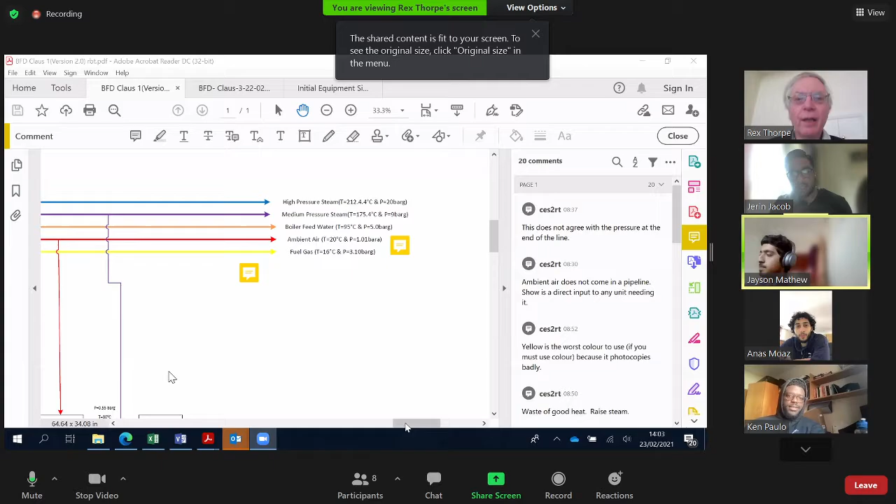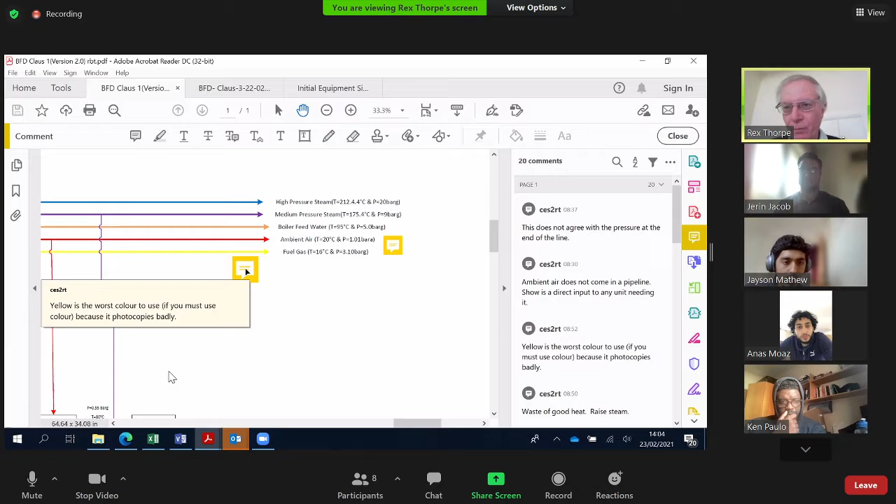Yes. No, can't see. Yes, yeah. Right.

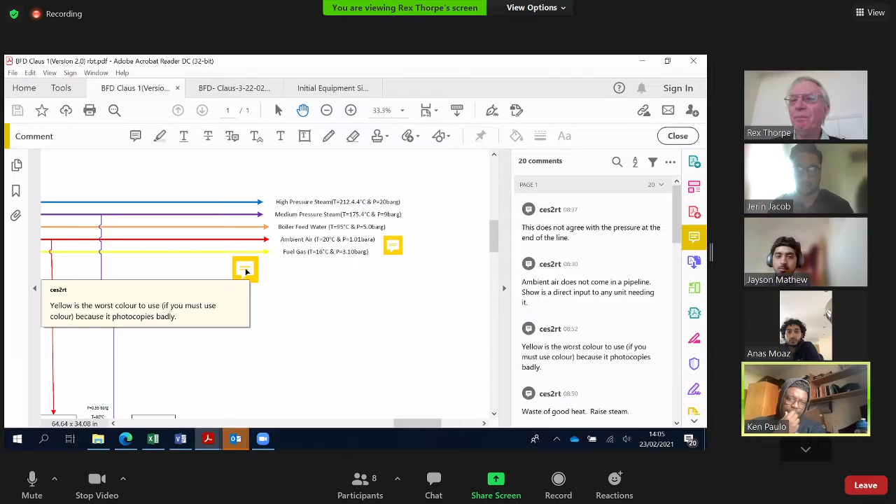You are not the first student to make this mistake. In fact, I would go so far as to say that 99% of students make this mistake. It's because they don't understand that these lines along the top are pipe lines. In fact, they're sometimes what we call ring mains.

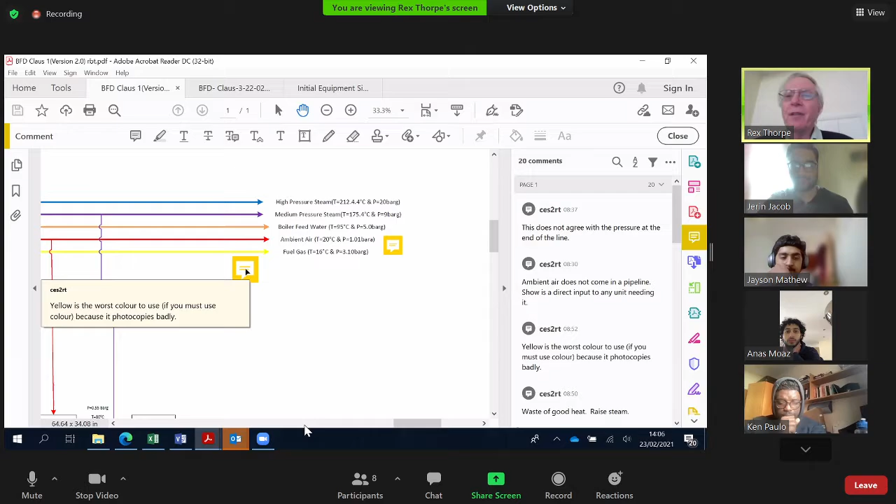And the idea of a ring main is that you have a ring of pipe that goes all the way around your little plot, and you can tap into any point on the ring main and take material out of it. So that one doesn't exist. So let's get through it.

Now, if we go backwards on this particular pipeline, notice it says 20 Celsius and 1.01 bar absolute. Mm-hmm.

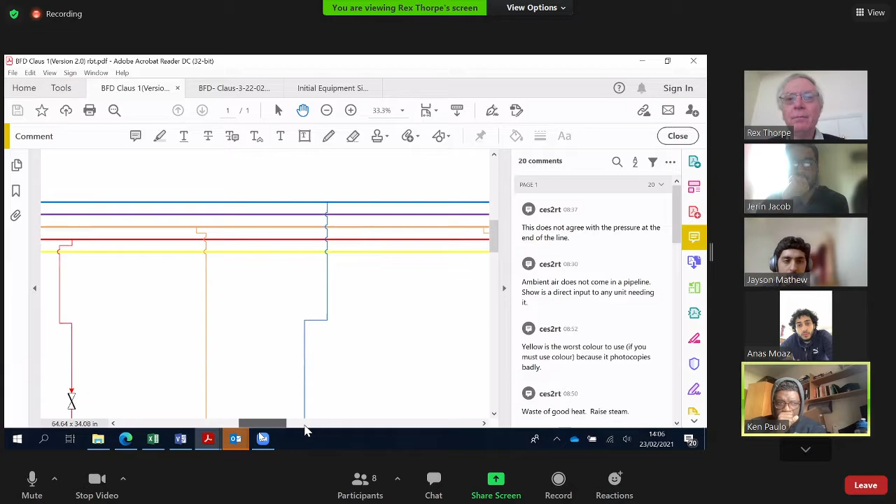That doesn't seem very consistent, does it? They're saying it's 16 Celsius and 0.53 bar gauge. That's not supposed to be, is it? I don't think that's supposed to be that. I think that's a stream. Another stream's. Well, it needs putting in the right place. Yeah, sorry, my bad, yeah.

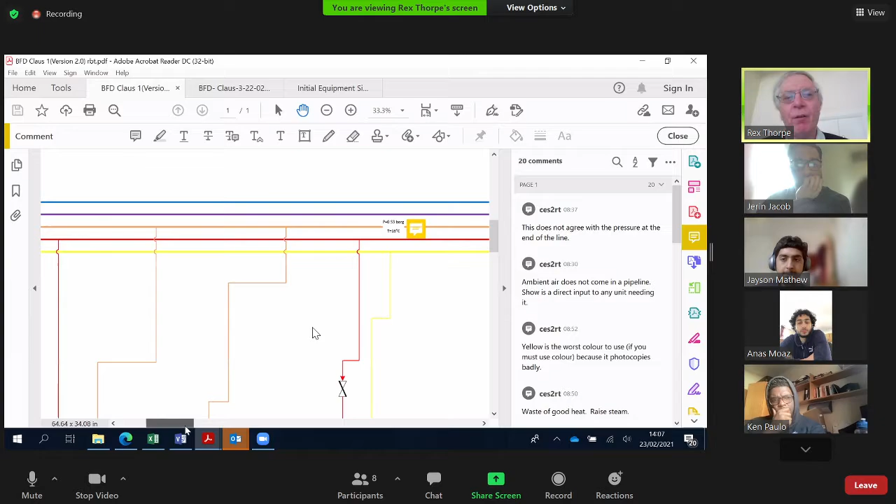Now look, there will be things on the block diagram like that which just need sorting out. But you've got to try and get this block diagram pretty well sorted out very soon. Yeah. Okay, all right. So let me have a look at this.

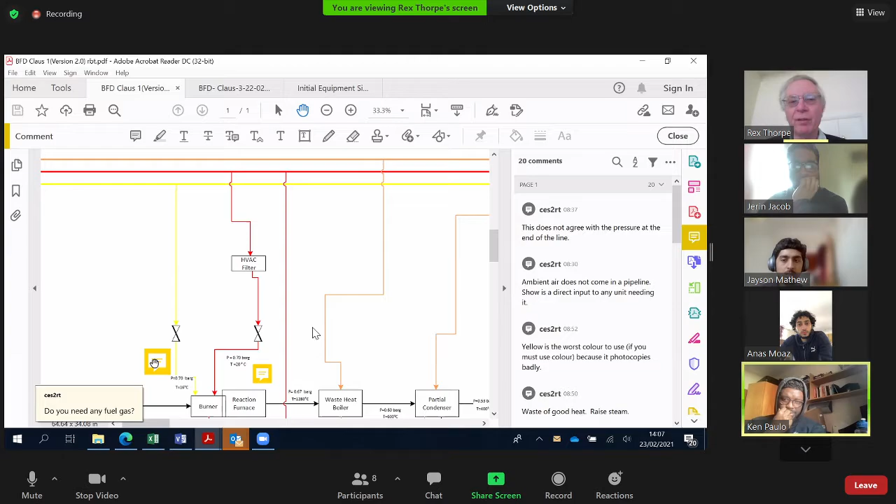So who is responsible for this part of the block diagram? Is there any person who's going to confess to being responsible for this area? Or, as in design? Is it in terms of design? Well, or do I just ask people at random about this? Do you all know about it? Yeah, as a group, yeah. As a group, okay, so let's start with Jerin.

Okay, why you have got this line coming down from this is fuel gas, right? Yes. Why do you need fuel gas in your burner?

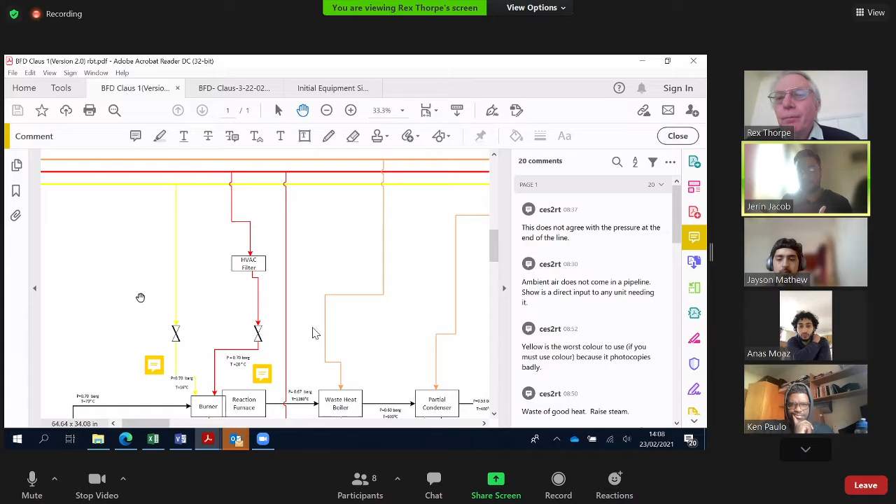So what I assume happens in the burner is you mix fuel gas with oxygen, and the combustion reaction produces a highly exothermic reaction, so the flames would heat up the reaction furnace, so that partial oxidation can occur.

Well, that's the key word, partial oxidation. Do you think that partial oxidation is exothermic or endothermic? It would be endothermic. No, it's exothermic. Exothermic, yeah. Also, not as exothermic as a fully oxidized reaction.

No, but it's enough to reach the temperature you need. You don't need any fuel gas. Okay. And if you do use fuel gas, it throws carbon dioxide into the system, which you have to get rid of later. So, no, you don't need any fuel gas.

So we're not considering using HP steam? Well, I'm coming to steam in a minute. Oh, sorry. I'm seeing as you're next on my list. No.

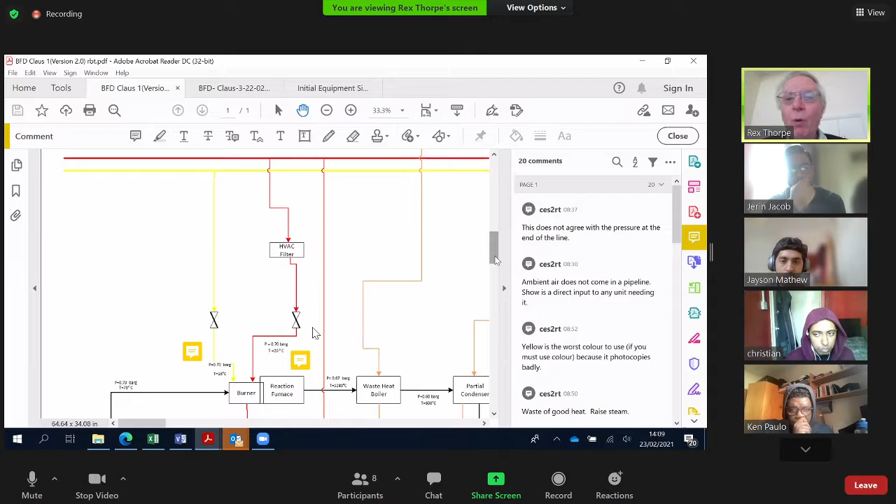What is this stream? So that stream would be the return for the flue gas. That's the return for the flue gas. What flue gas? So initially we were planning to use flue gas for a reaction furnace.

So once it gets used up in the process, I think it should go to like a return. But unless you haven't got any fuel gas now. Oh, okay, so why do you need some fuel gas?

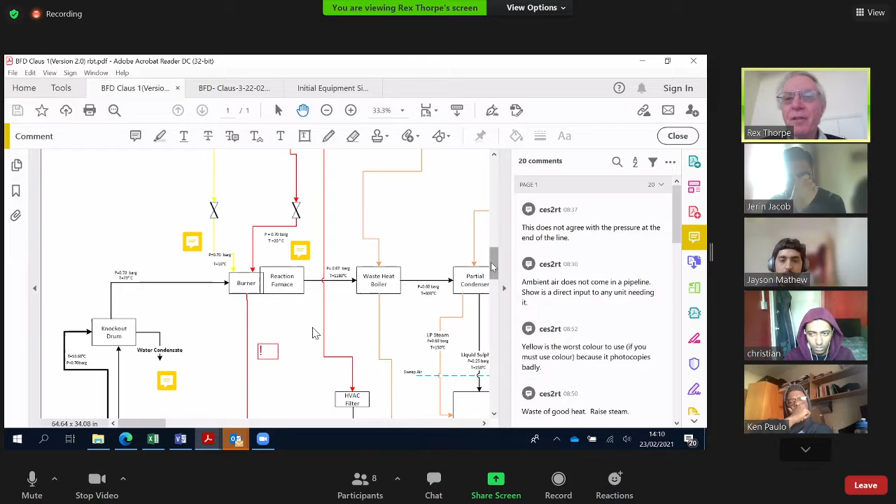So it would be condensate if we use HP steam. Well, I don't know that you're using HP steam. Oh, okay, sorry, yeah. Are you using HP steam? We were planning to use it. Where's the HP steam supply? Sorry, so we were planning to use HP steam, but then we're stuck with flue gas.

Sorry, I don't understand what's in your mind here. If there's no fuel going in, there is no flue gas. I suspect you're thinking this is like a furnace, in the sense that when you look up what a furnace is, it has air and fuel going in, which burn to create flue gas, and in doing that heats up something. This is not that kind of furnace.

This is really just a burner with a space for the flame to be in, which we call the reaction furnace. The burning and the reactions you want are the same thing. So you do need the air, but you don't need any fuel gas. You don't make any flue gas. Your flue material is the process flow.

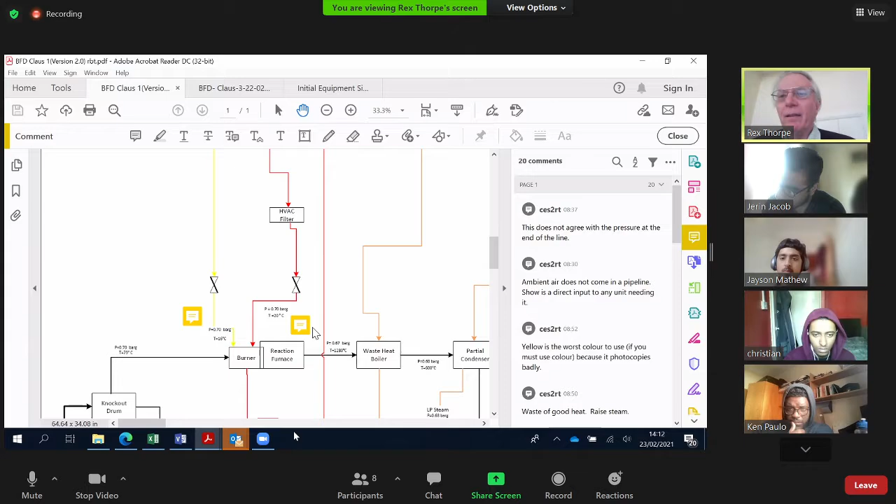If you've ever run a gas cooker, or done some camping and had a Calor gas stove, you'll understand there's a device through which the gas comes. That is the burner, and the flame sits on it. It doesn't touch the burner, but it is in a stable configuration with respect to the burner, and it sits there, then the flame is in the right place, and you can put your pot on top, and it gets heated up.

So the burner is a distribution device, and the reaction furnace is the space in which the flame sits, and the flame is the reaction. You have to surround that flame with something to make sure it doesn't burn the passing operator or some other bit of the plant. So that's why you need a piece of equipment called the reaction furnace.

So because we're burning something, is it a good idea to use a jacket, or do we not need a jacket?

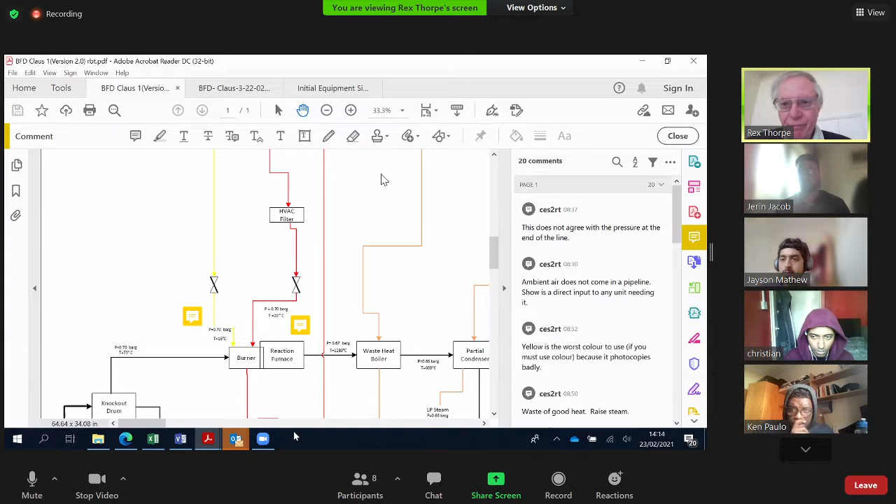Now you're asking about the construction of the furnace. In a conventional furnace, what you have is a fairly thin steel wall, and then you line it with bricks on the inside, which we sometimes call refractory bricks. The flame then is inside the bricked part of the chamber. What the bricks do is insulate the metal outer layer, which is what stops the gases from escaping. The metal is insulated from the hot flame by the refractory bricks, and therefore the outer skin of metal is at a modest temperature, and therefore doesn't need to be made of anything very expensive.

Thank you, sir. It's much easier to stack the bricks if your reaction furnace is vertical, not horizontal. You're showing it horizontal at the moment, but it's a block diagram, so don't worry about that too much until you do the PFD.

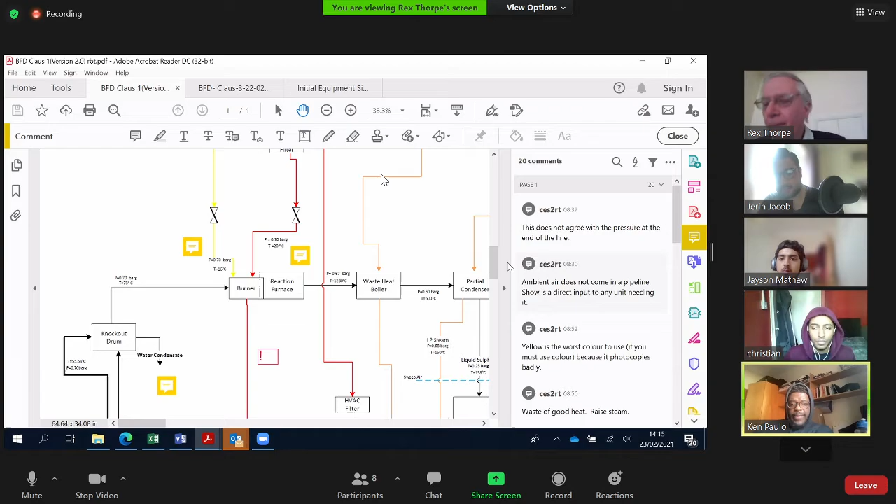I'll ask Ken. Yes, sir, where does this water condensate go? We were planning to use a recycle, but we found out it wasn't a good idea, so we thought to dispose of that condensate. You want to dispose of it? Yeah, dispose it or do a water treatment to avoid environmental impact. You want to send it to wastewater treatment?

Yeah. Okay. You have in your brief a requirement for the cleanliness of that water - you need to be able to send it to wastewater treatment. I doubt very much you're meeting that requirement, and the reason is there'll be too much dissolved hydrogen sulfide in that water, because it's just been in contact with sour water stripper gas and acid gas.

How come you can't recycle the water condensate? Is it because it's got H2S in it? Well, where are you going to recycle it to? So can we recycle it back to the knockout drum? That's what I was thinking as well. Well then, no - water is arriving there. You can't just recycle it.

Or we could preheat it. It's in gaseous form, so you can't directly put it into a knockout drum. So you can either heat it before it mixes, but then there's the heat duty. But even if you're heating it, what's the point? I mean, because there's H2S in that water condensate, if we preheat it the heater would have a high duty. It's less than 100 parts per million, so it's not a huge amount of hydrogen sulfide.

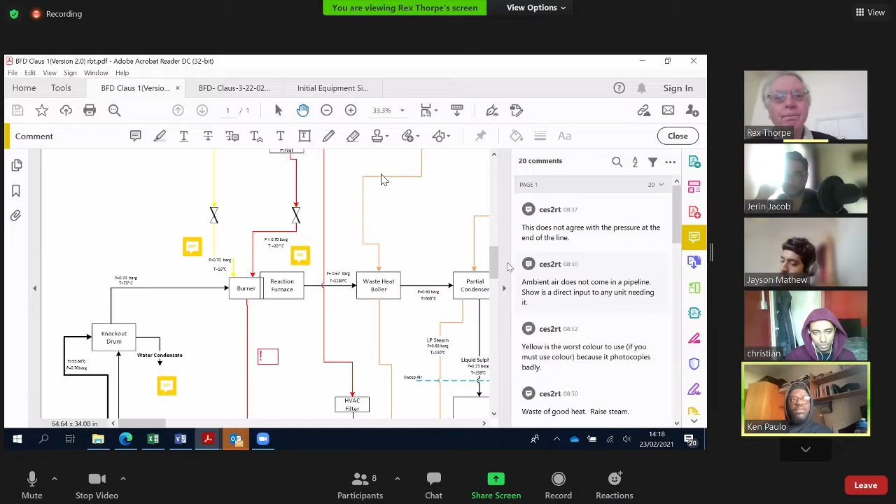Can we dispose it? We can't, no, H2S. You're being told in the brief that somebody will take it. You can send it to wastewater treatment at the refinery, provided you remove some of the hydrogen sulfide from it. Okay. We'll come back to that in due course.

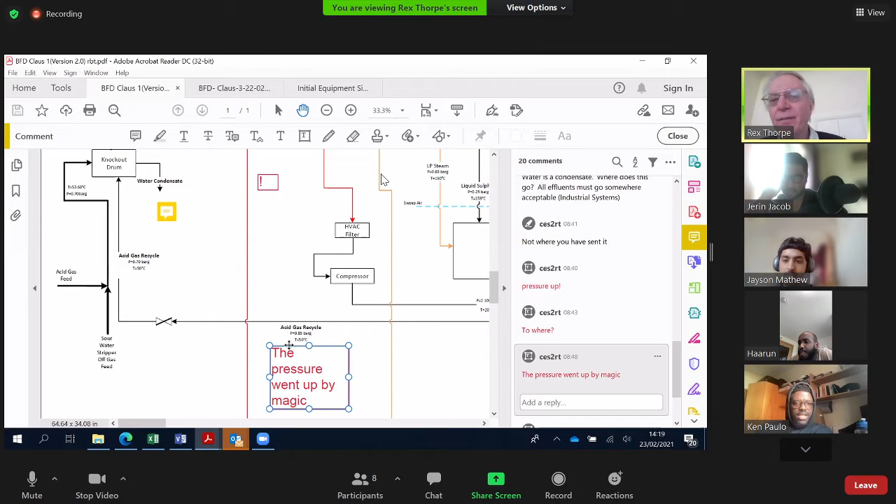No, you don't endorse that pressure. Why do you? Well, okay, what pressure should there be on that line? It should be the same as it left the reflux drum. Right, very good. But what is the pressure at the reflux drum, Haarun? 0.55. 0.55 bar gauge, yeah.

So how does it go into the knockout drum then? How does it go into the knockout drum? Knockout drum is at 0.7. There's a valve in front of it. Sorry, valves do not increase pressures. So you have to put a compressor there. You can't, it's full of hydrogen sulfide. Yeah, sorry, that's actually dangerous.

Would you use a - I don't know the answer actually. Sorry. I'm being very hard on you, Haarun. I'm driving you into a logical dilemma. The gas going into the knockout drum must be at 0.7 bar gauge. At the moment it's coming from somewhere where the pressure is less than 0.7 bar gauge, and you can't use a compressor. How about if you use a pump? No, it's a gas.

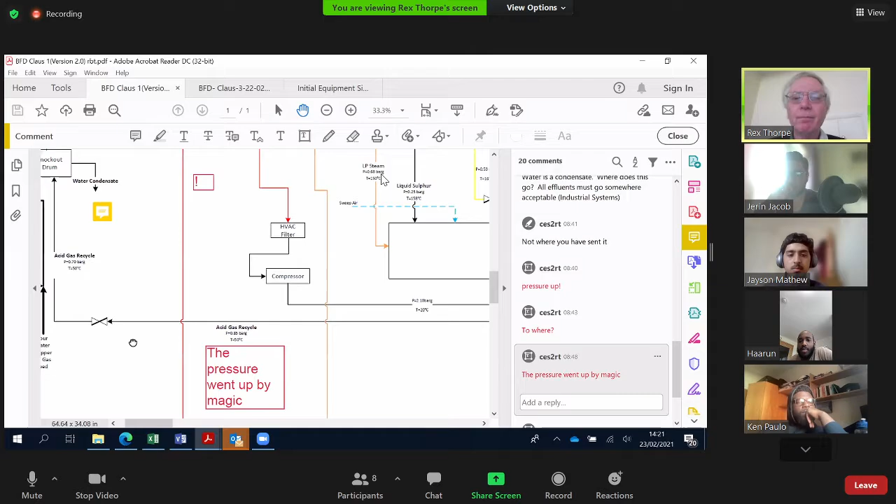So what's actually wrong is the pressure of the reflux drum. We're travelling a long way. Here we go, the reflux drum. So at the moment the reflux drum is at 0.55 bar gauge.

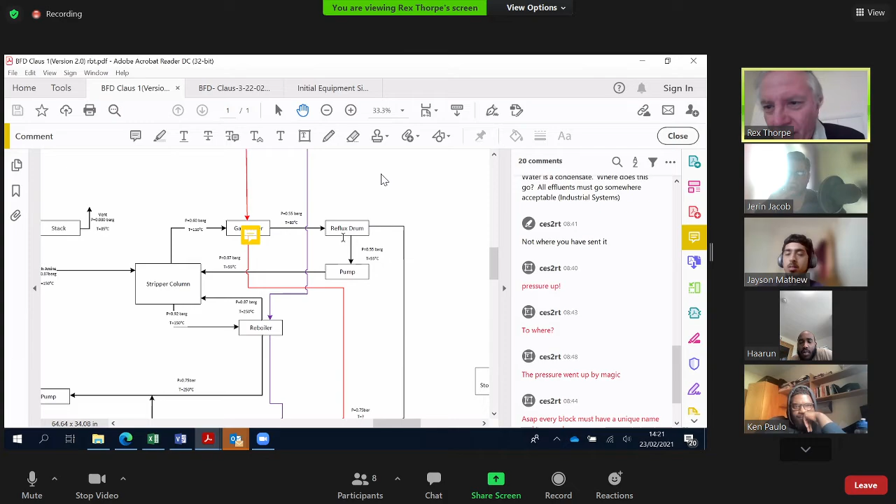You need it to be at least 0.75. Okay, but that means that this has to be 0.8. Okay, which means this has to be, well, probably more than 0.87, right? Yeah.

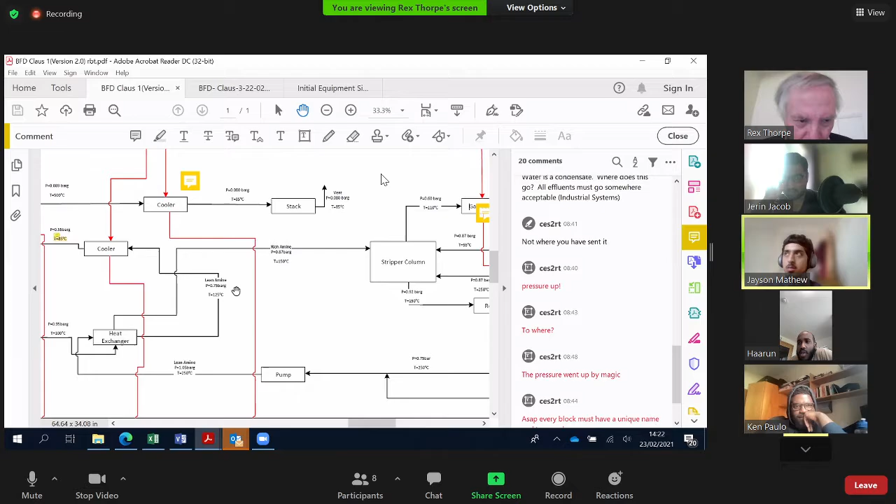Which means that this pressure should be higher, so increasing the absorption column. But that's okay because you've got a pump. Yeah, we can increase that pump, yeah. We can increase that. Yeah, okay. So, column.

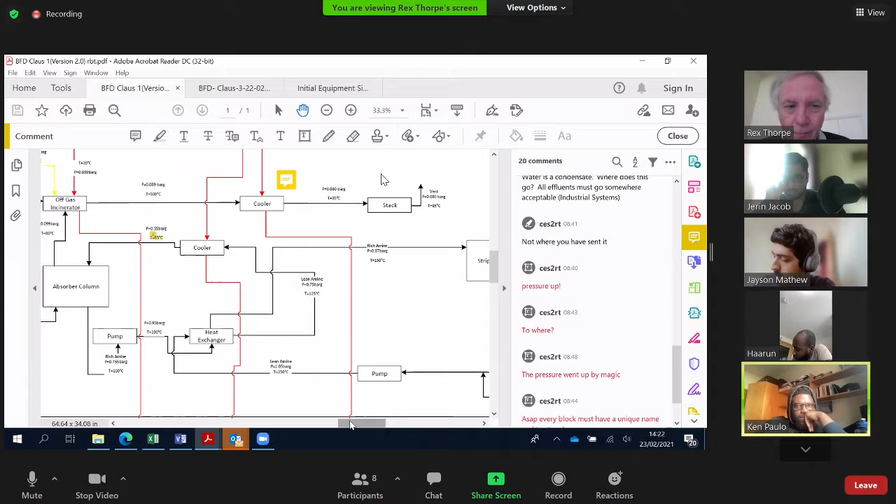So we're going to Anas next. Yes, sir. He's quaking in his boots. What will I find? Ah! Yes.

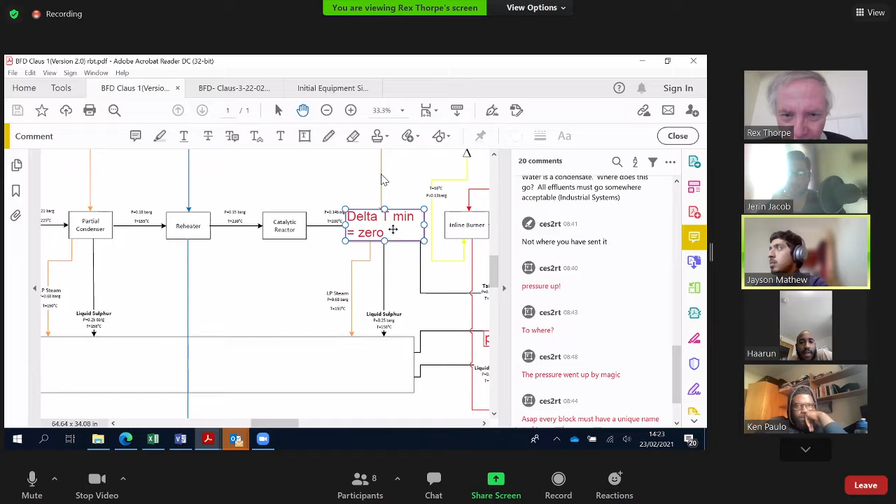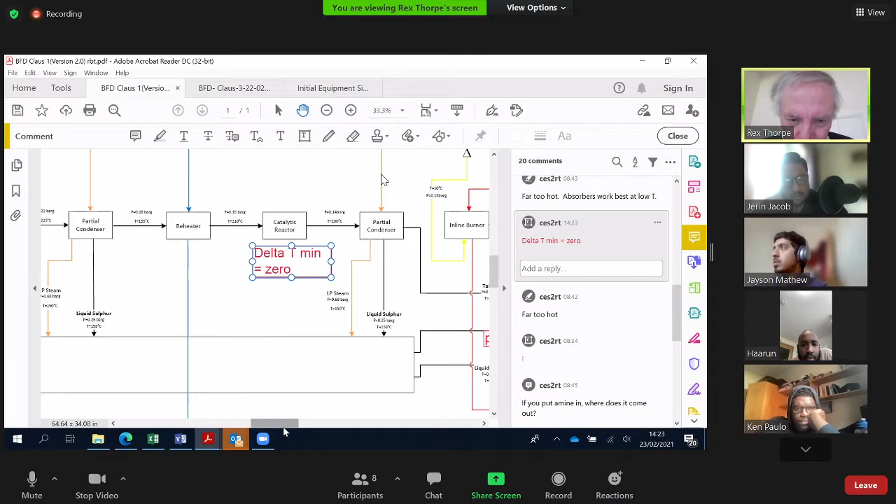See this partial condenser? Okay, let's look at the temperatures around it. 200 going in, and then everything cools down apparently to 158. And we're cooling it down with this stream here. And what you've got there is boiler feed water coming in and making low pressure steam. And the low pressure steam is at 150.

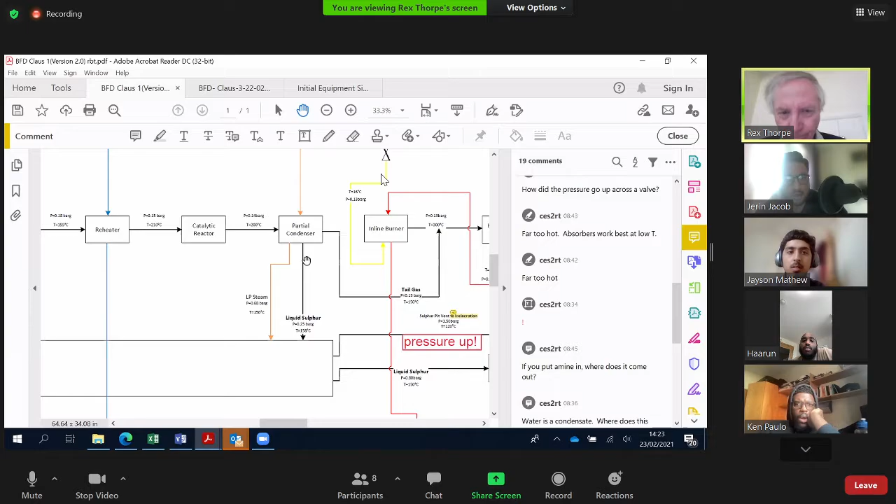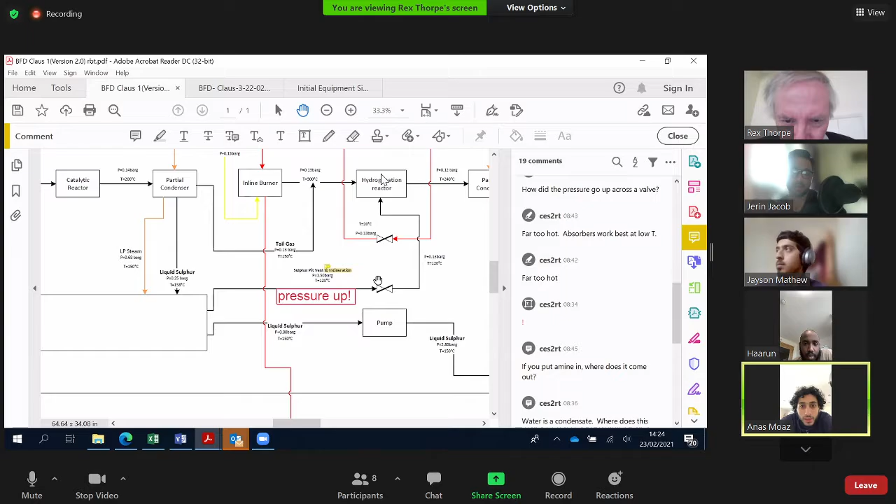Okay, so I've got that wrong. It's okay. Right, so Anas, see the pressure here? And see the pressure there? That's okay. But what's the pressure in the sulfur pit?

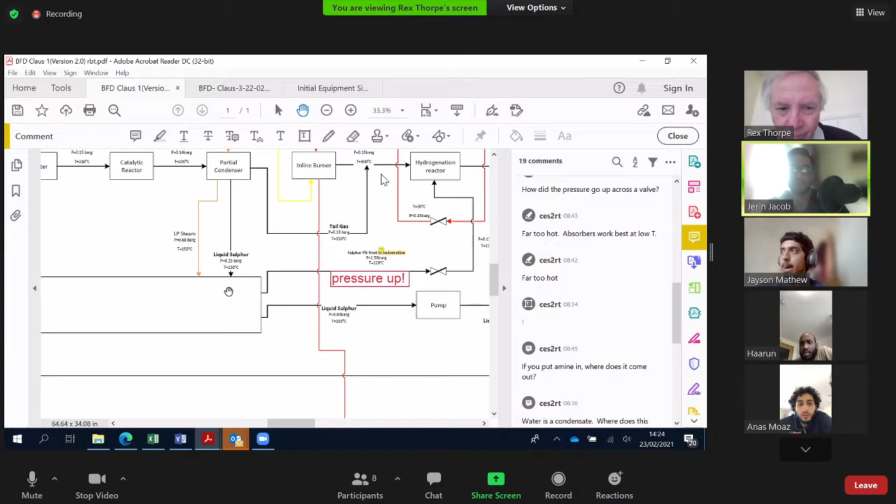In the sulfur pit. I'm not sure. Well, I put it to you that the sulfur isn't going into the sulfur pit if the sulfur pit is at a higher pressure than 0.25 bar gauge. It's not actually liquid sulfur that's going to the sulfur pit vent. It's the air that's being pumped in, the ambient air. So if you scroll to the left, at the bottom of the sulfur pit, there's an inlet of air at 2.10 bar G.

So that collects up the residual H2S that might have been left in the liquid, and then it goes through. Yeah, but wait a minute. This air is in direct contact with the liquid sulfur. They can't be at different pressures. Okay, yeah, true. And it must be direct contact, otherwise you won't be doing any stripping.

So you, in your mind, had two different pressures for two fluids in the same compartment. That can't be right. Yeah, but they're not mixing though, so... They're not mixing. Well, how does mass transfer take place if you don't mix them? How do you get the hydrogen sulfide out of the liquid sulfur and transfer it into the air if they're not in contact?

That's true, yeah. So I'm afraid I'm right that all of the fluids in that compartment must be at the same pressure. Okay, yeah, you're right.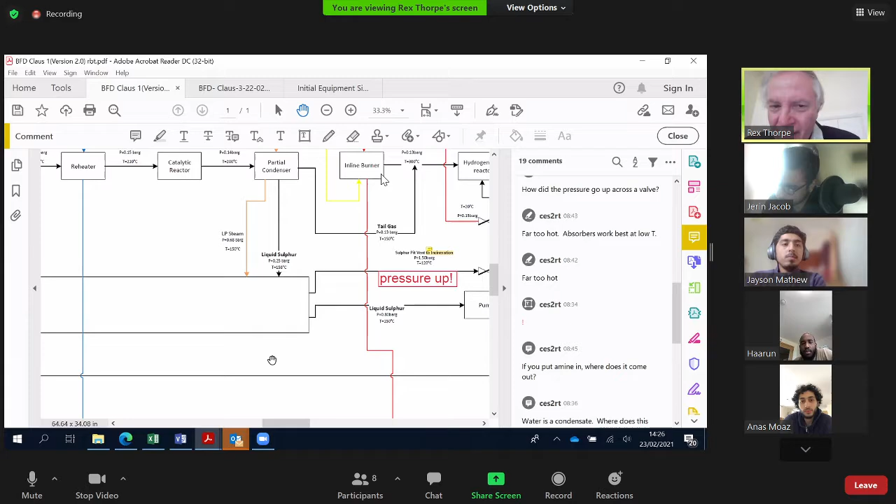Of course, there may be different pressures depending on height in the liquid, so there's a hydrostatic issue. But in terms of the space above the liquid sulfur, you must have a uniform pressure, and you can't get the liquid sulfur to go into that compartment unless it's at an equal or higher pressure than the gas in that compartment. So this 1.5 bar gauge here is wrong. Is wrong, yeah.

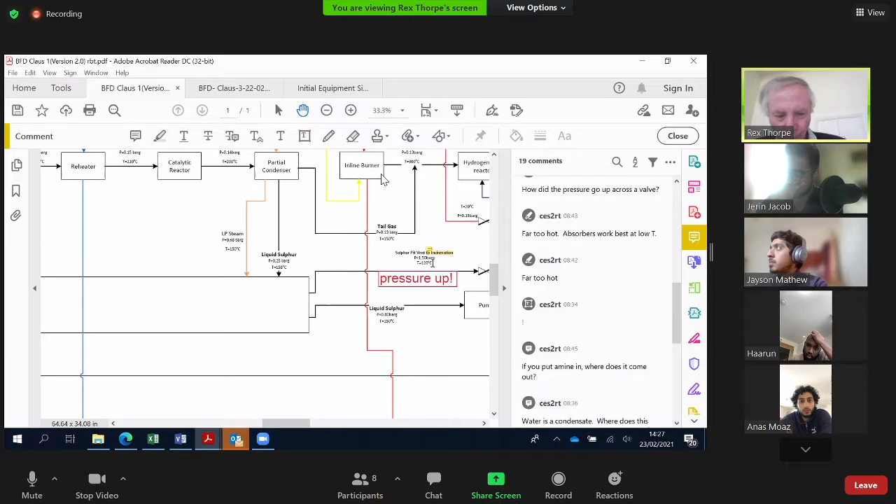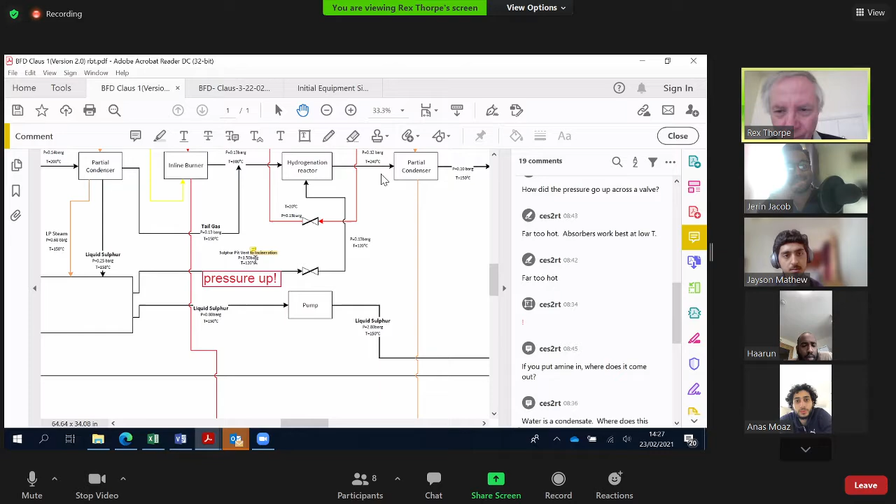Okay, now that creates problems around here. So, Anas, it says to incineration. Is that going to incineration at the moment? No, that's going to the hydrogenation reactor. And what is the biggest component of that gas flow? In other words, what is the chemical with the highest mass flow rate in that stream? That stream, that's this one, this pipeline here that's got pressure up written underneath it.

Well, that's going to be air carrying the H2S. Okay, right, that's fine. So it's mostly air with a little H2S, yeah? What happens when you put air into your hydrogenation reactor? It's going to react with... well, it's going to blow up. Oh, you don't want air there. Yeah, no. So somehow that line is going to the wrong place. Needs fixing, doesn't it?

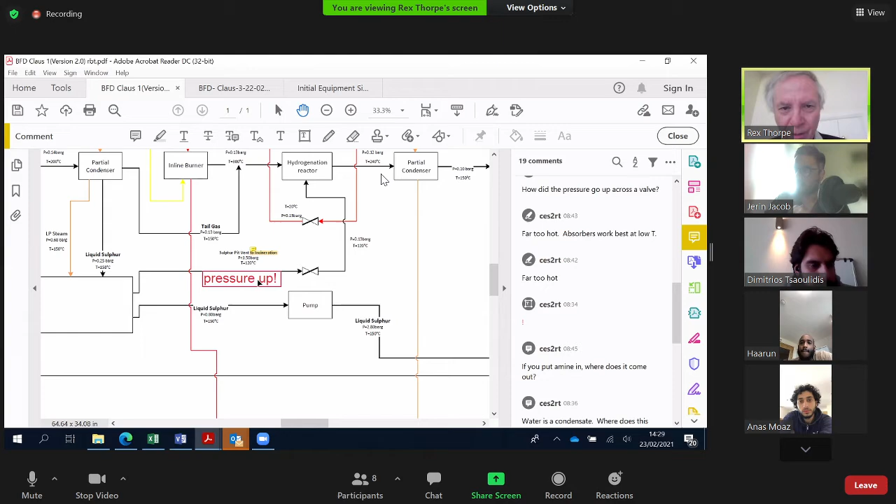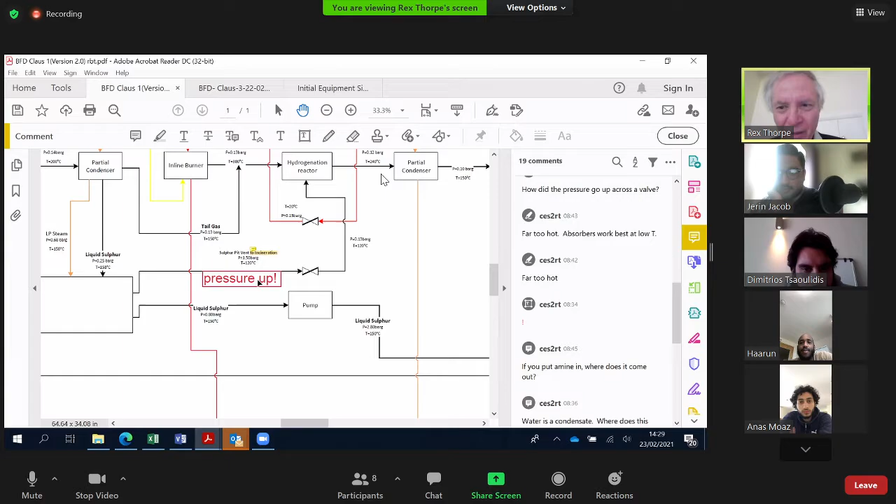Sorry, I initially put it to the incinerator, but then I got feedback from Dr. Dimitrios saying that maybe it might be useful to pass it through the hydrogenation reactor. Well, it might be useful to put it in the inline burner. Okay, alright. Oh, so through the inline burner and then, okay, that makes sense. Did I say that? I don't remember saying that. You sent an email with the feedback. I'll check. Okay, yeah. Sometimes these messages get misinterpreted. But I think you'll find there's been a misunderstanding there.

Christian. Yes, sir. We've got an absorber column here, and you're putting stuff into it at 150 Celsius. Yeah. What's the liquid in the absorber column? Could you scroll up a little bit please? I just want to see them.

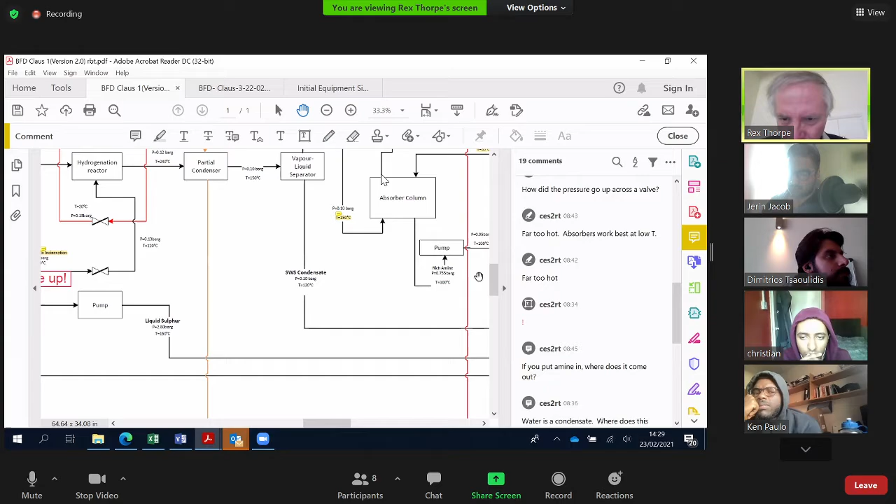Yeah, oh. The stream, that's the top stream here. It's mainly vapor going into the air going into the absorber. No, I'm asking what this liquid stream is here. It's like, oh.

I'm not too sure. You're not too sure. Okay, all right, let's go to somebody who might be a bit more sure. So we're going back to the top now. Jerin, what is that liquid? This liquid here coming out of that cooler. That would be lean amine. That would be lean amine. Yeah, right? So amine without any... yeah. Okay, so that's short for what?

Sorry, the lean amine, what is it short for? So what is the biggest component of that stream by weight? Well, the amine that we chose was MDEA, methyl diethanolamine. Yeah, okay. But you didn't choose MDEA, you chose MDEA solution. Solution, yeah, sorry. Okay, so solution of MDEA in what? Water solution, H2O, water. Yeah, okay, right, very good, okay.

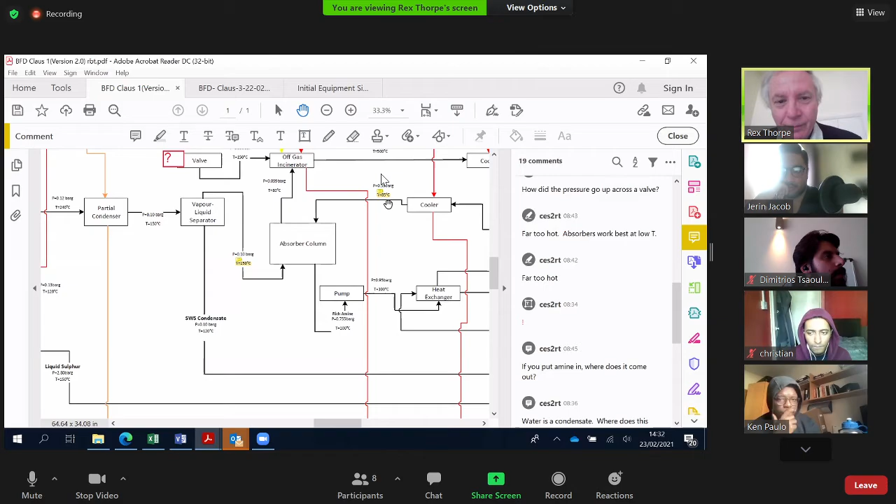It was just a bad estimation. Because what we can do is increase the condenser and then cool it down further before it enters the absorber. You need to get the lean amine temperature down, and you need to get the gas temperature down.

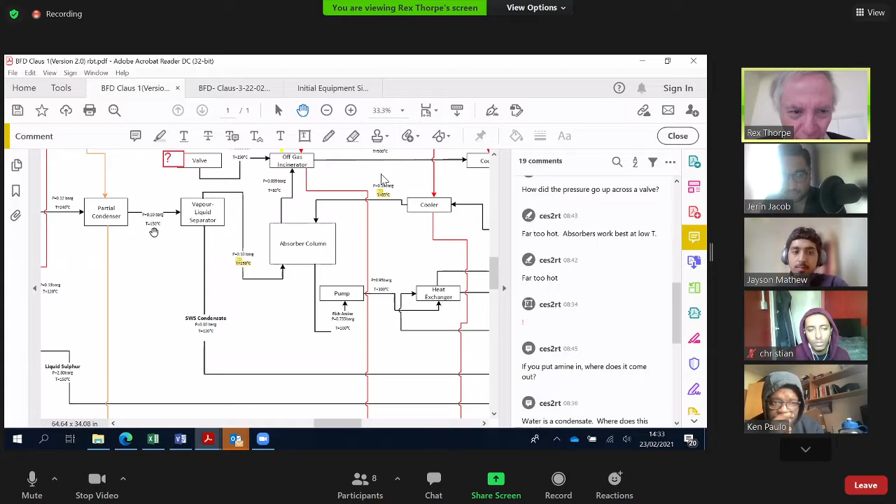That means you may want to change that temperature. What would you suggest as a reasonable temperature range for an absorber column to operate at maximum efficiency? What are you cooling with here? Air. Jayson? Ambient air. So who was that?

That wasn't Jayson. I didn't see his lips move. It was me, Jerin. Okay, Jerin. Okay, so it's ambient air, right? Ambient air. To what temperature can you cool stuff with ambient air?

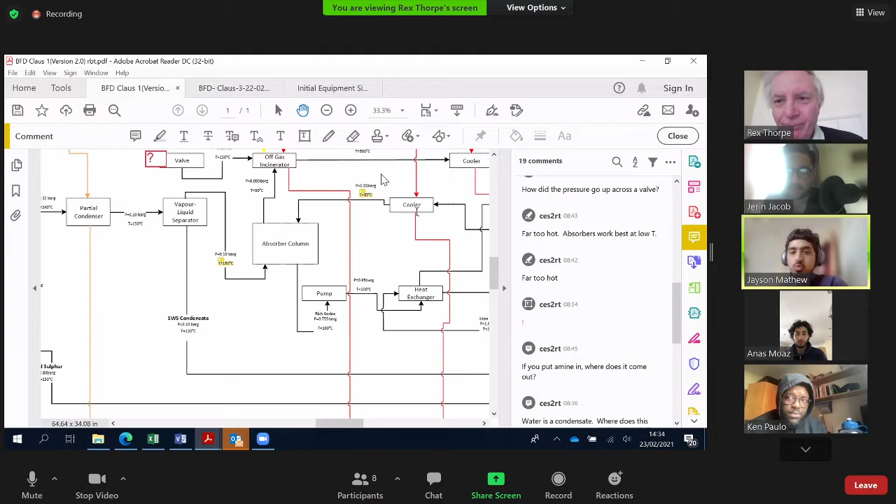To 25 degrees. No, well, on a coldish day, yes, but not always. What can you guarantee to get to on the hottest day in summer? 30s, like 35. 35, 30. Well, 35 is on the edge of being possible.

So 35 is a bit of a stretch because your delta T min would have to be nearer 5 than 10. But you might manage 38, 39 or 40 using air as your coolant, which means the cost is going to be very modest. And I'm not recommending that you go to refrigeration, which is very expensive. Do you have your answer? Yeah, thank you very much.

Now look, this block diagram is not yet in a state for us to be able to define areas. It's not yet in the state where you can start simulations. You need to get there within days. Okay?

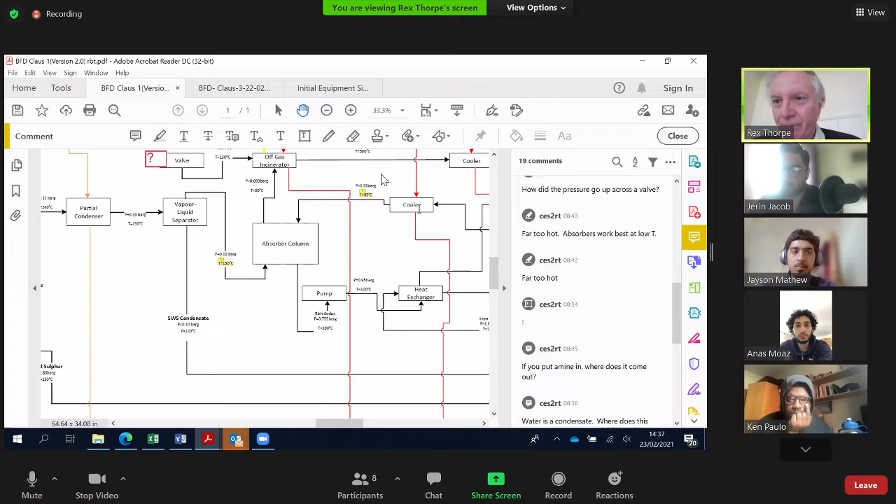You have to propose what blocks are in what area to us, and we then have to approve it. Can't approve the block diagram until it's in a better state than this. When we approve the block diagram for areas, you will then not really be allowed to change the blocks, but you can still change the temperatures and pressures based on your simulation. Is that clear? Yes, sir.

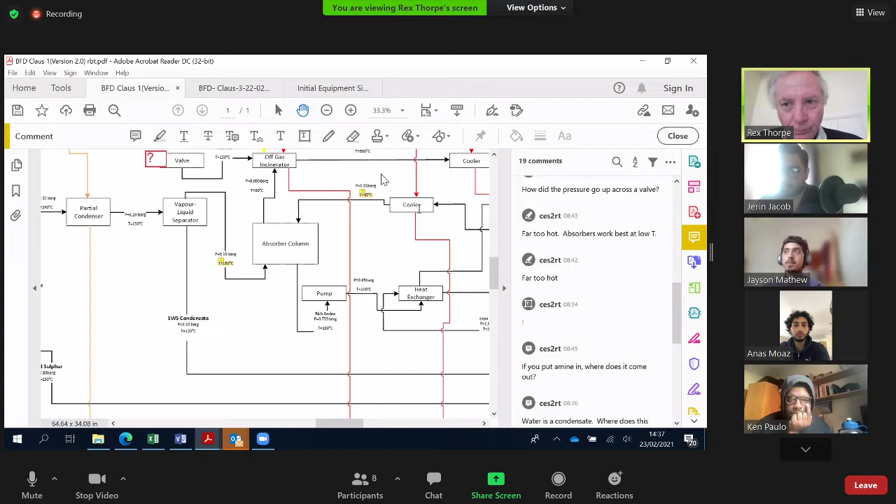I think you can get there within a day or 3, but you've got to do that, and then we've got to give you the inputs to your areas so you can start to do simulations such that you can at least try and bring something in the way of a simulation to next week's meeting. So this is going to be a busy week. Now, of course, you won't have the control exercise to do, so you've got more time to spend on it. Okay, and I know POM is coming up, and there'll be a week where we just do nothing.

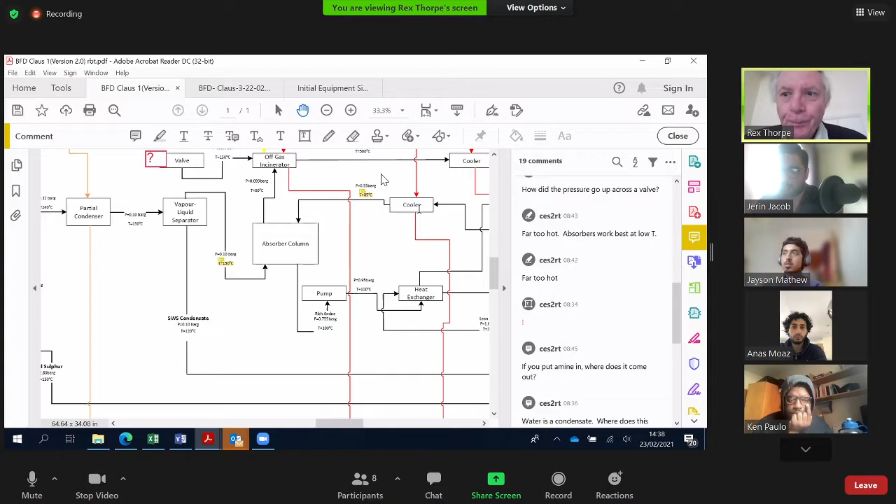Yeah, you need to speed up a bit. Dimitrios, did you have some feedback for them based on some of the other documents? Hello, Dimitrios. Is Dimitrios gone? Sorry, yeah. You also sent... I'll stop sharing. Yes, there are other comments on the block diagram, which I will send to you.

So, you also sent equipment sizing. So let's go through that then. You did, who did that? All of you together, or was it a group? Yeah, it's a group. First of all, we split our group into areas, so area engineers, and then we did the equipment sizing for our respective areas.

Alright, so in general, most of the procedure that you have there is logical, as far as I saw it. We will go step by step now. Can you share your screen if you're going to talk to a document, Dimitrios? Yes.

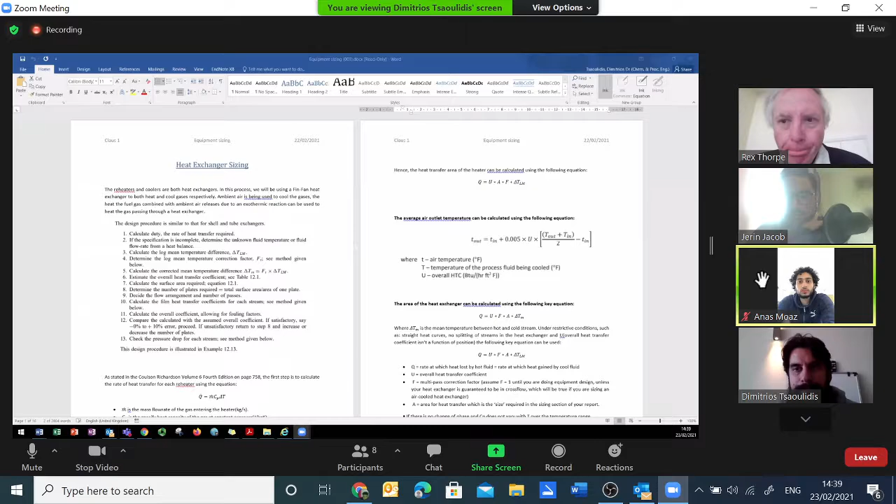So let's start with the heat exchanger with some questions. This is the procedure, one procedure on how you select, what I can see here.

Christian, what are the different heat exchangers that you are going to use? We're going to be using fin fan exchangers. We're going to be using shell and tube. I'm not sure of the others as well. What was the first one? Fin fan heat exchangers.

And based on what are you going to choose? Where will you put a shell and tube heat exchanger, or where will you put an air-cooled heat exchanger? How do you choose? I'm not sure, I don't do that. Take a guess - how you will choose an equipment based on what process you have, what are the main parameters that you care about.

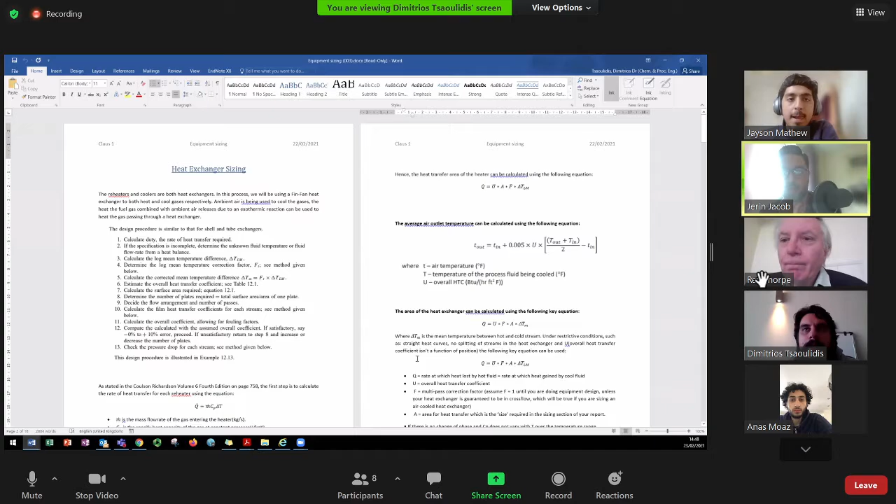Yeah, okay, thank you. Alright, then you have here - what time is it? Ten to ten, ten three. We've got 12 minutes left, Dimitri. Okay, so let me go through that.

Then, yeah, okay, correct, this is the right procedure. You need to take into account when you can use the temperature difference - that one, the logarithmic temperature difference.

So wouldn't it be different if we're condensing, if there's condensation or evaporation taking place? Because then we have to use the mean temperature difference instead of log. And how will you decide whether you can take one or the other, based on what? Based on the temperatures at which the heat exchangers are operating. So if the temperature causes the gases to condense and the liquid to vaporize, then we can't use a log mean delta T, so we have to use the mean temperature difference as the delta T for that heat exchanger.

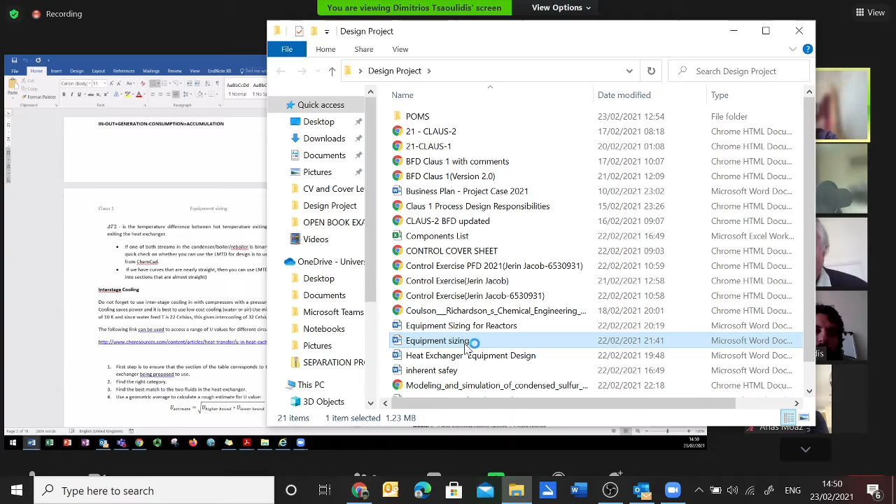You will need to get first, for your heat exchanger, the heat curves. Heat curves - how will that help? From the ChemCAD, yeah. So what will the heat curves tell you? The heat curves might be what - linear or what?

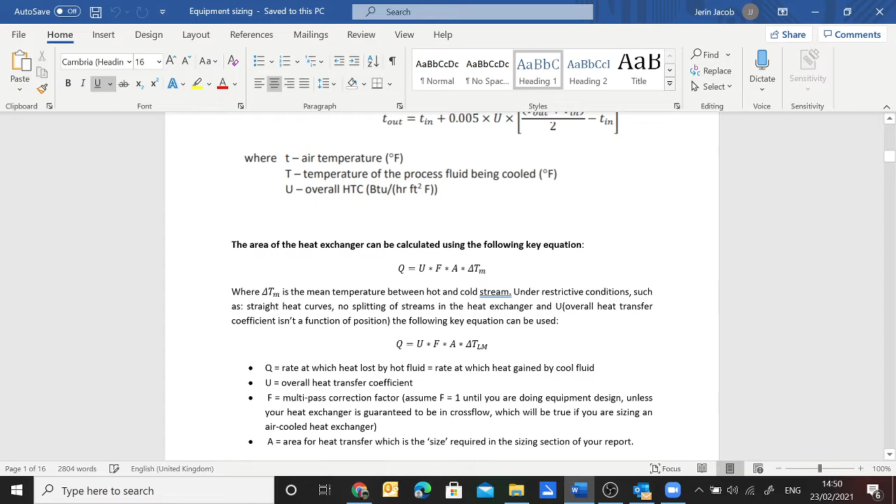That's it, or exponential, non-linear. And depending on that, what strategy are you going to use? If we have heat curves that are linear, then you can use the logarithmic mean temperature difference. Correct. And if they're not linear, if not, you have to use the mean temperature difference, or you have to divide the curve up into sections that are almost straight, and then use that. You divide the heat curve up into sections that are almost straight, and then use - correct - and then add them all up and have the overall heat transfer coefficient, and then the area.

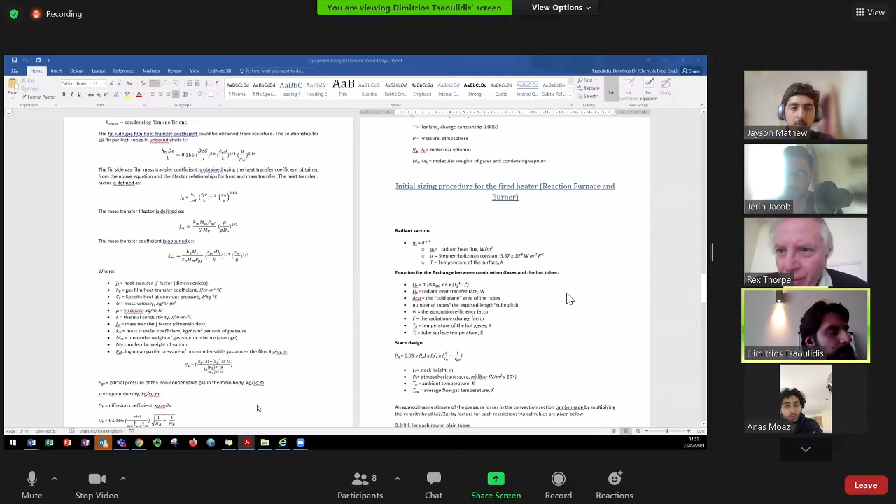Oh, sorry. Let me continue. Can I just jump in? Because I think I saw...

There is a danger with these equipment sizing calculations - you need to understand there is process design and there is equipment design. And the book will not be clear about the difference, because it's a University of Surrey difference. The University of Surrey difference is that you just need the method to get the sizing parameter.

So for heat exchangers, I don't want you calculating overall heat transfer coefficients - that's for equipment design. You select an overall heat transfer coefficient from a table and calculate an area, and that's it.

But in the case of a shell and tube heat exchanger, would we not have to determine how many shell passes there are, how many tube passes? No, really? Okay, all right, you just need the area, mate. Okay, good.

Now, in equipment design, if you're designing a heat exchanger, then of course you'll need all of that and a lot of other things as well. But we haven't got there yet.

Right, okay, so it's important that you realise you are just putting down in this document only the stuff which gives you the size - which means it's a clever thing to do to start by saying the sizing parameter for this piece of equipment is. That then focuses the reader's mind and your mind on what you are trying to calculate.

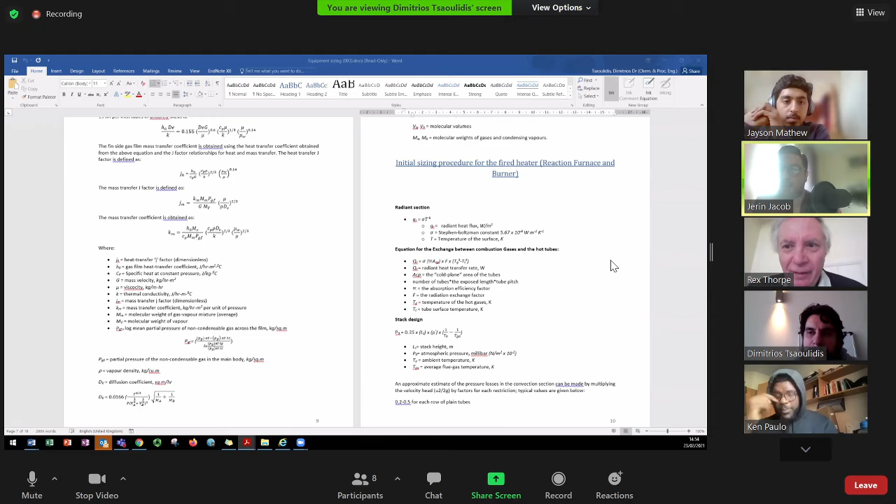ChemCAD does mass balances, it does heat balances, it does the whole lot. Yeah, my bad, okay.

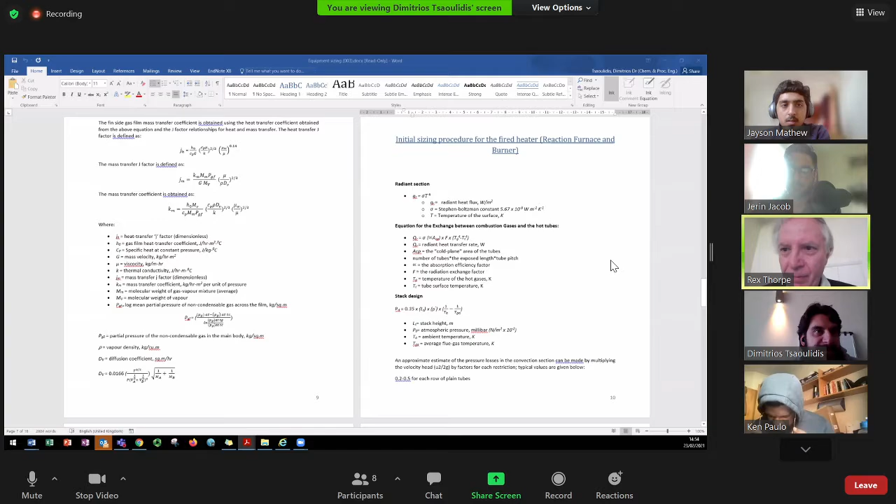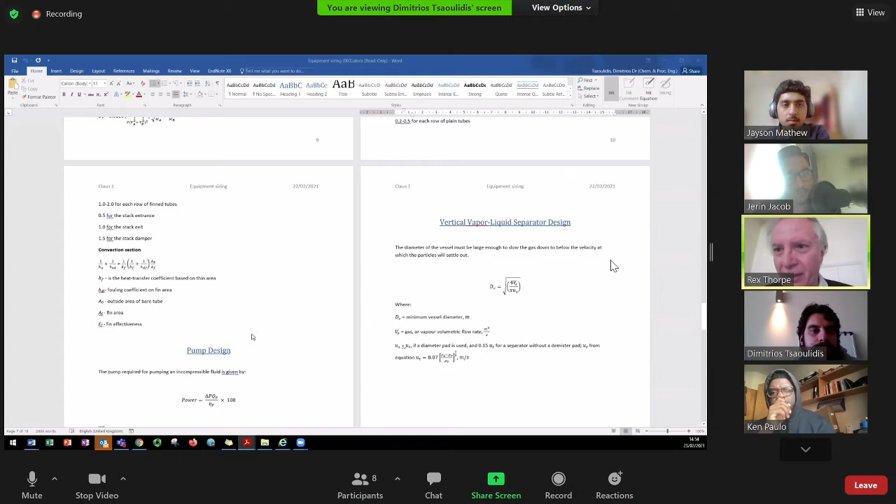But this seems to be a pretty full document. Somebody's worked really hard. I did have a slight problem with the heat transfer section where it suddenly mentioned plates in the middle of a method that was meant to be about shell and tube heat exchangers.

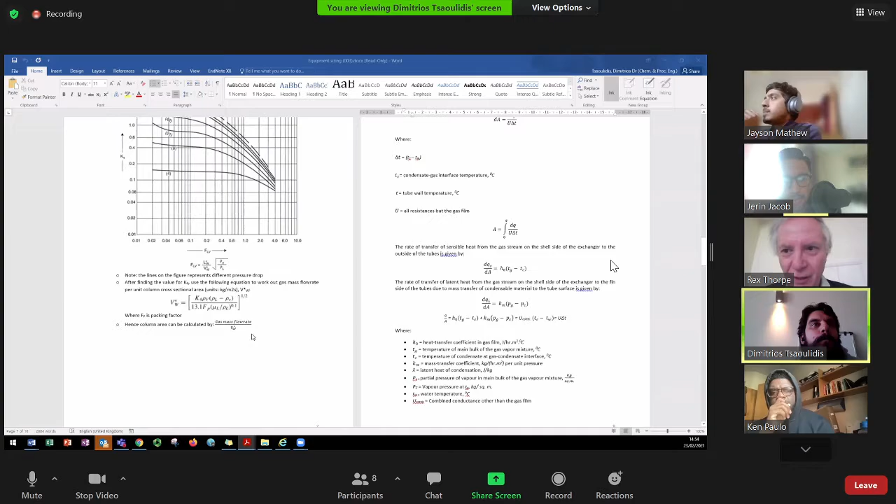I don't recall that. First page. First one. Oh, I think it was regarding the distillation column. Is it what we're talking about? No, there - the design procedure is similar to that for shell and tube heat exchangers. Well, this is meant to be about shell and tube heat exchangers, isn't it? Yeah, go up a bit, Dimitrios.

That is a design procedure for a plate heat exchanger. I know where it comes from, I even know which book it comes from. Yeah, and there isn't a reference. It's stated at the bottom: Coulson Richardson, Volume 6, 4th edition, page 758.

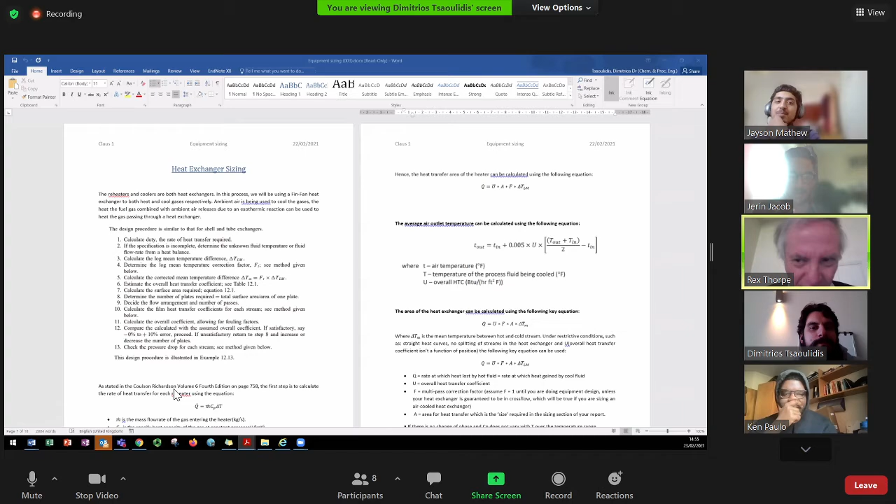That looks to me like a scan. Yeah, but the reference, okay, is at the bottom. Well, that's okay, but that's a bit clumsy.

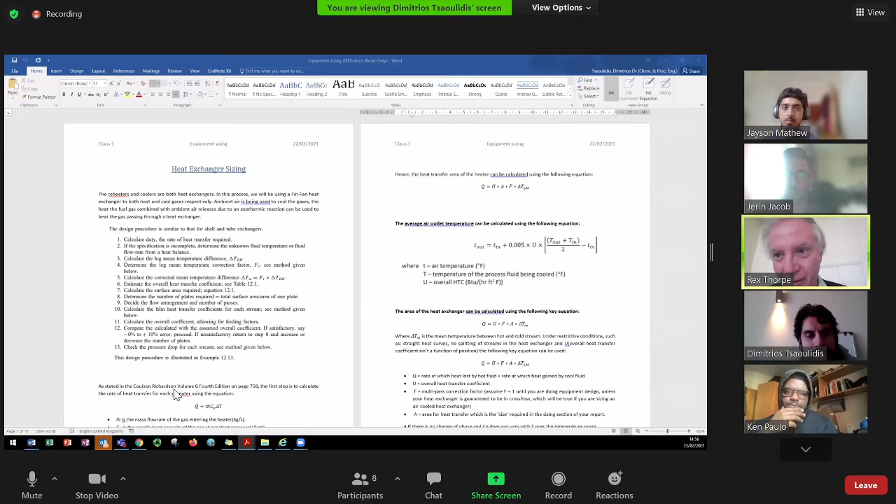But your introduction doesn't say here is the method for a plate heat exchanger, as far as I can see. And this is what Dimitrios was getting at: your first question is what kind of heat exchanger are you choosing to use, and on what criteria. That is the first thing you have to do. And then if you want to do a plate heat exchanger, that may be a pretty good method, but it's not the method you use for a shell and tube heat exchanger.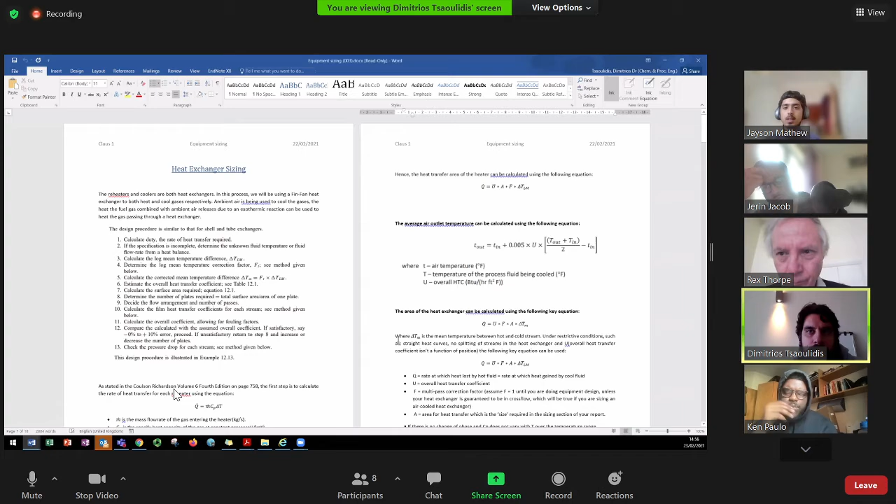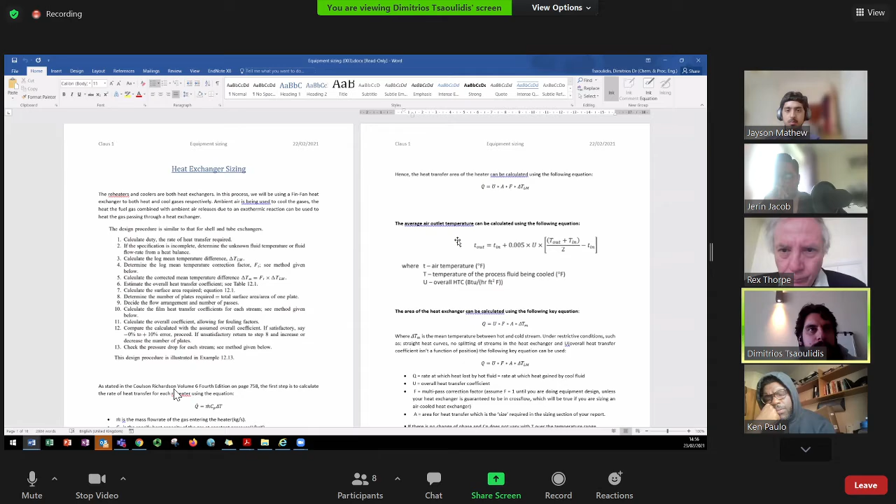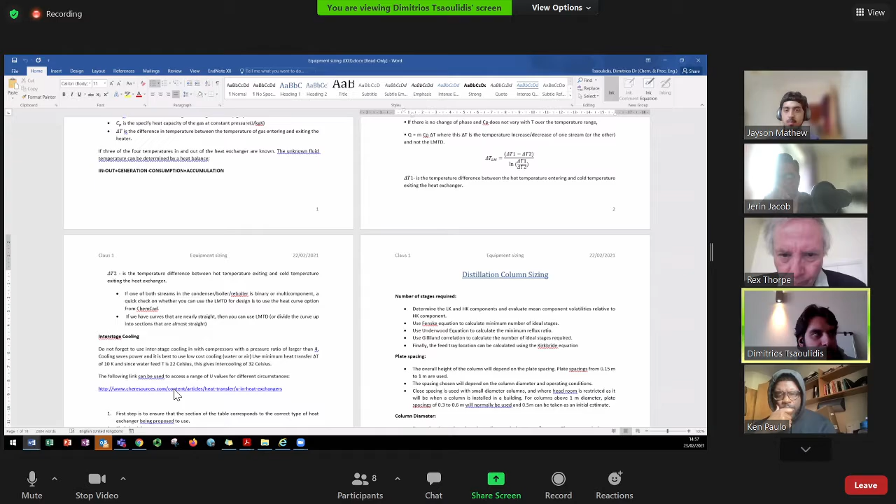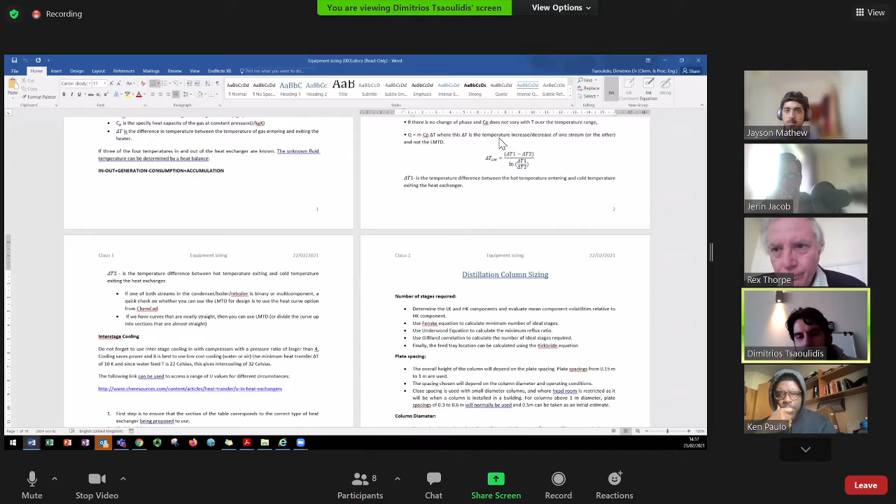Then for the reactor, what is it? What do we care about when we have a reactor? What is the sizing parameter? Volume. Think a bit - catalyst, the amount of catalyst. Well, that's one of the things, yes, because the other thing is the volume. Well, sadly not - if you go to a costing book, it won't say volume, I'm afraid.

Tube sizing, for if it's a PFR. You're guessing. The volume, you will need it, but you will need it to calculate something more important, which is the sizing parameter. Because the volume is the volume that you have inside your reactor, but the sizing parameter is not only the volume for that, for your catalytic reactor. Size of catalyst? Is it the size of the catalyst? How would the size of the catalyst define it? No, you're guessing. You've got to go to a sizing book and find out what the sizing parameter is. It's no good guessing.

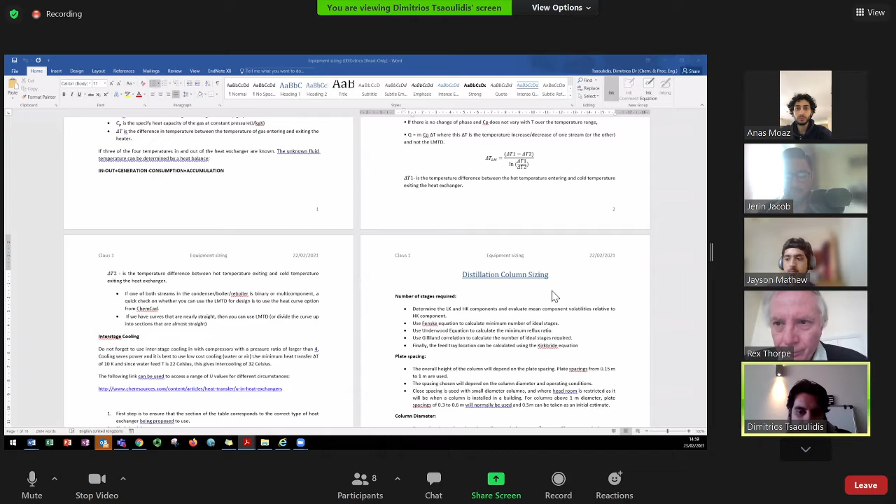So have it as a list, and we can discuss it through the office hour - I mean, have it as a list. And then, as far as I remember, we talked last week, it was your group, about the COMAH procedure, and we said that you need to do an assessment for all the components present in the process. Have you thought about that? Yes. Okay, then we can discuss that and see.

We said to identify and classify in terms of potential hazards, and to discuss it further here or in the office hours. Have you done that? Sorry, can you repeat your question? Sorry - we said that you need to assess all the components in the process, or try to, and to identify and classify them in terms of the potential hazards. That's what we said in the previous meeting.

Yes. I'm going to leave and join the next meeting. Come and join me when you can, Dimitrios. Okay, yes.

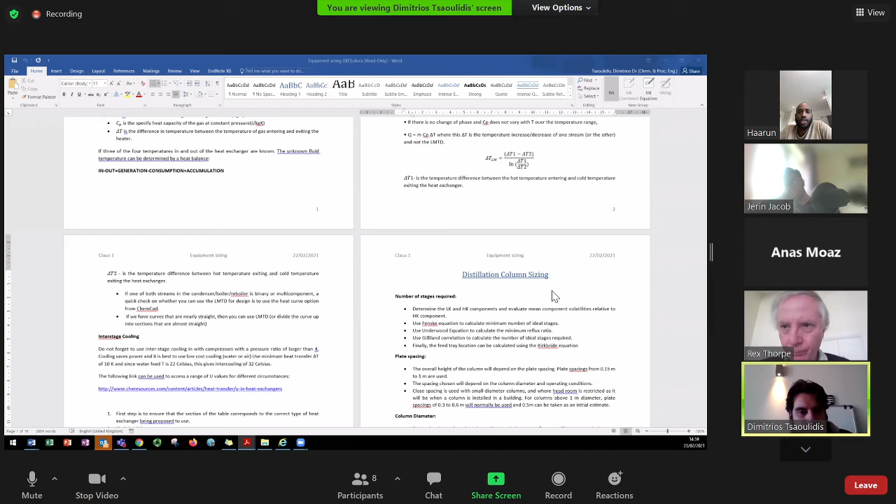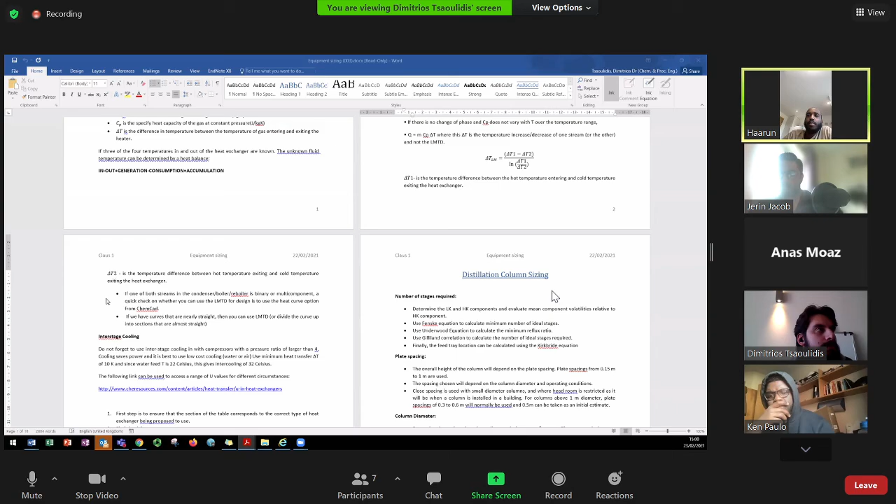Should I continue on? Yes, please. Yeah, I tried to do all of them, but then when it came down to the scoring, it doesn't really have any scores for the majority of them. So only the...